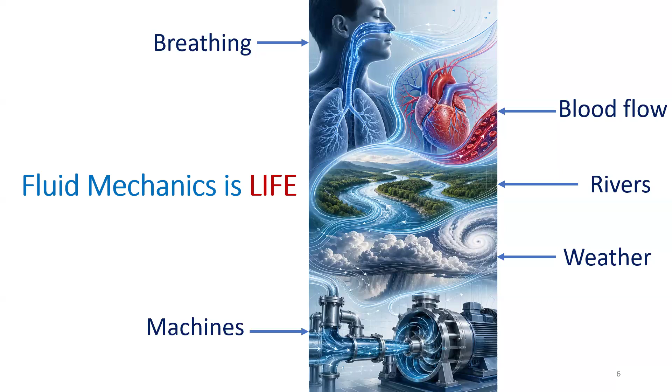There is plenty of such applications. Now, when you're breathing, when you draw air into your body, that is an example of fluid mechanics. In the same way, blood flow, flow of rivers, both natural and open water channels, exhibit behavior governed by fluid mechanics. Weather, formation of clouds, and movement of clouds is governed by it too. Then most machines, especially turbo machines, pumps and turbines that we operate, they all function based on fluid mechanics.

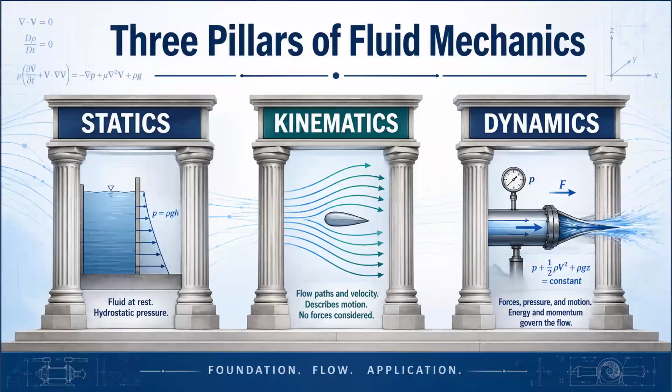Now moving on. Fluid mechanics, as you would have learned so far, can be classified into three fields of study, which I would term the three important pillars of fluid mechanics. First is statics, then kinematics, and then dynamics. Statics largely deals with fluids at rest. Kinematics deals with fluid motion without taking into account the cause of motion - we don't discuss forces, but rather describe the motion. And in dynamics, we take into account the forces, pressure, and study the motion as well. Force and pressure play major roles in fluid dynamics. Clear understanding of all three fields is essential for you to become an expert in fluid mechanics. Now, in Unit 1, you would have studied fluid statics.

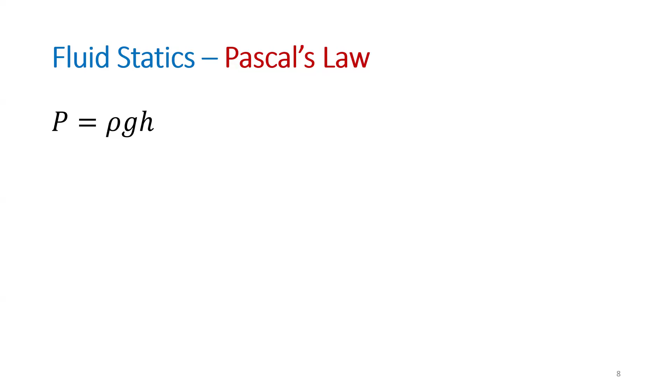One of the most important laws you have studied in fluid statics is Pascal's law, which gives you the equation for pressure at a point within a static fluid body, given by rho g h. Now, this Pascal's law has wonderful applications in terms of force magnification and force transmission. For example, when you press the brake in your vehicle, you are actually using Pascal's law, which states that force is transmitted equally in all directions. So when you step on that brake pedal, the fluid from the pedal cylinder gets transmitted to the wheel cylinders, and that action applies force on the wheels, resulting in the braking action. So this is one of the applications of Pascal's law, an essential part of fluid statics. In fluid statics, the key variable is pressure.

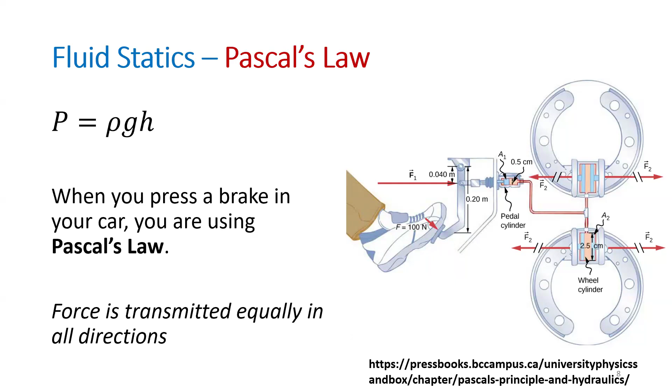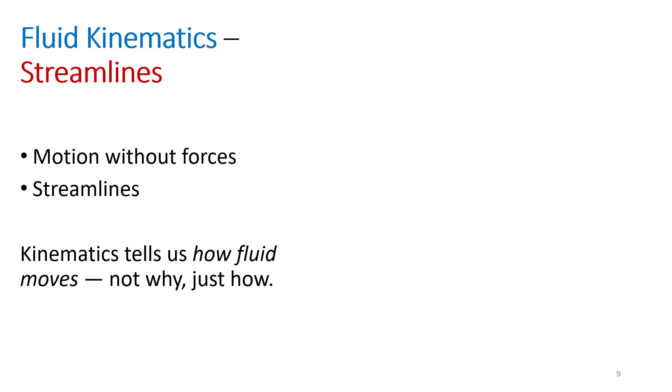Now, if you look at fluid kinematics, we largely deal with streamlines. What do you mean by streamlines? A streamline is a path followed by fluid particles at any given instant. So we describe fluid motion without taking into account the forces that will act - it just tells us how fluid flows. The key variables here will be velocity and acceleration - these are the two primary variables we will be studying. So it just tells us how fluid moves. For example, if you look at a Formula One vehicle, we would be interested to know how fluid flows over the structure, so we can identify regions which induce drag, and modify the structure so the drag is minimized. To understand that airflow, the flow of fluid around and along the structure, we make use of fluid kinematics.

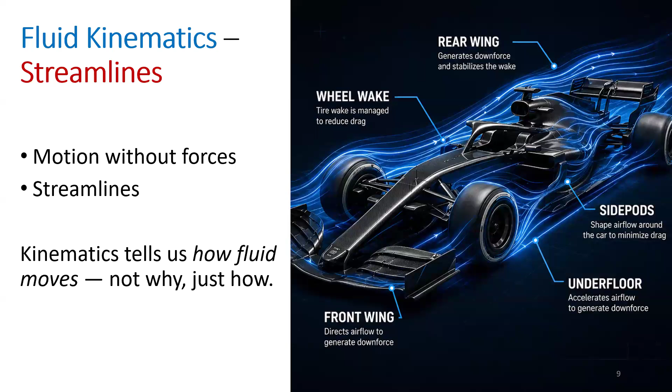Then comes the most important area, which is fluid dynamics. I'm sure all of you have studied Bernoulli's equation this semester, a wonderful equation which has allowed humans to build so many wonderful fluid applications. The Bernoulli's equation essentially gives you the relationship between variables such as pressure energy, kinetic energy, and potential energy. It basically states that the sum of pressure, kinetic, and potential energy has to remain the same. Therefore, this leads to the important insight that if velocity changes, the pressure will also change. So this is what you have studied in fluid dynamics.

Now going forward, we now enter into using this Bernoulli's equation - you can understand why airplanes fly. You can see that because of the difference in velocity, we create pressure differences, and it is the pressure drop that provides the lift. So that's one of the reasons why airplanes fly. We also look at why fluids will accelerate.

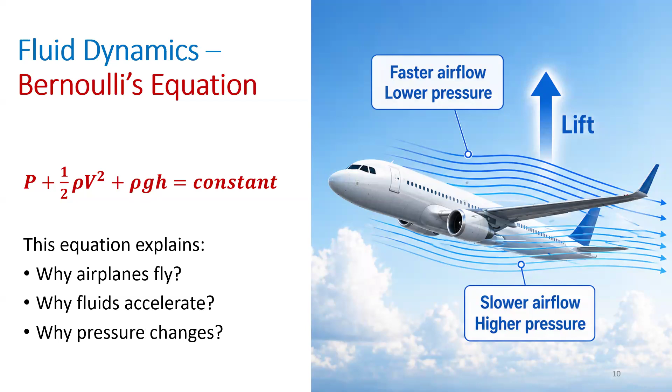We also look at why there should be pressure change. That is also an important application. So to summarize where you stand, you have studied fluid statics, kinematics, and fluid dynamics. You have looked at fluid at rest, the motion of fluid particles, and the fluid forces. So this is where you stand.

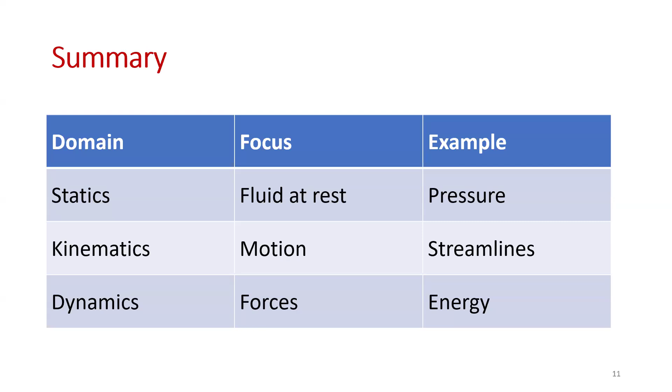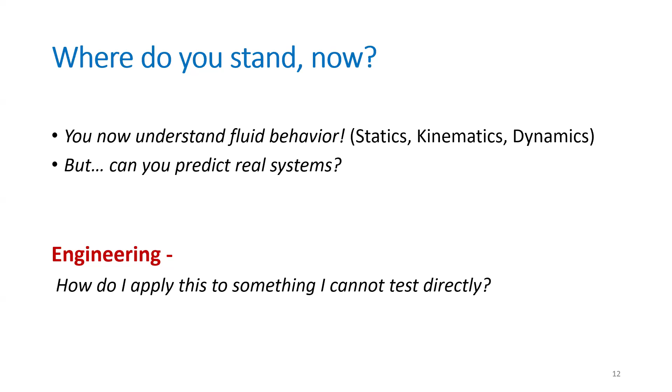Now what I want to know from you is, by understanding this fluid behavior, is it possible for us to predict real systems? Because when you are engaged in engineering, you will have to apply this knowledge to build and operate something. So the key thing to ask is, how do I apply this knowledge to something that I cannot test directly? Say, for example, a dam. I cannot build it and then test whether it will work or not. That will be dangerous. So what do we do then?

The problem we are dealing with is, I cannot test a real dam, I cannot test a full aircraft, I cannot build and then test whether it will work or not - dangerous. I cannot test a full river, it's massive. So what do engineers do? They build models. So this forms the main topic of the day: to understand the performance of a prototype, we will build models and study them. Through that model, we will predict the performance of the prototype.

Oh, I'm sorry, my bad, my mistake. Let me... just a second. I'm sorry, just hold on for a second. Let me share my screen again. I hope the screen is visible now. Yes sir, all right, okay.

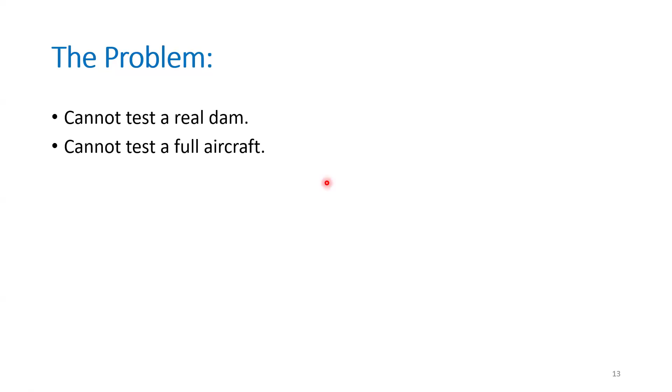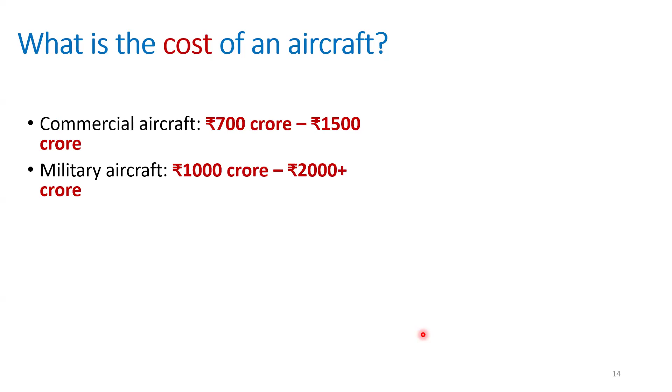Now, why is it needed? Because we all know that aircrafts are very expensive. Usually, a commercial aircraft is somewhere between 700 to 1,500 crores. Military fighter jets are between 1,000 to 2,000 crores. For example, our Rafale is estimated to be somewhere about 1,600 plus crores of rupees. Therefore, we cannot prepare the prototype and then check if it will work or not - that is not how we do engineering.

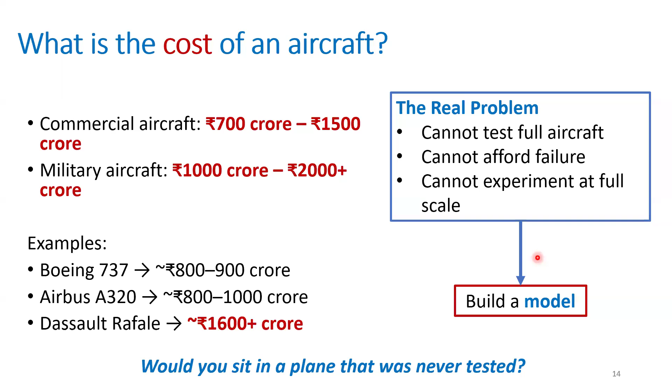What we do is we build a model. And this model cannot be randomly made - if I ask you, would you sit in a plane that was never tested before? All of you definitely say no, absolutely no. No matter what free seats they provide, you will still never enter that plane. So that is why similitude and model analysis is very important.

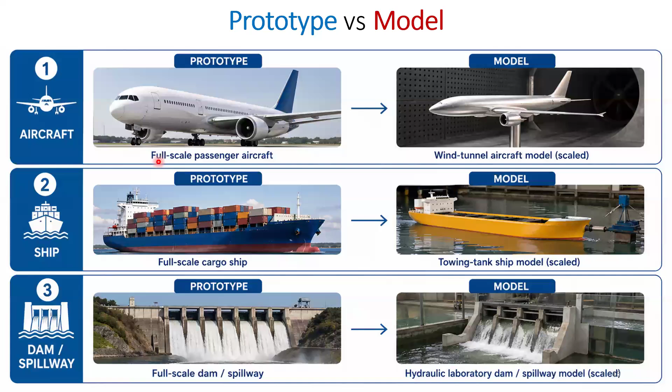The same way you have a full scale ship on the left. To test its performance, we have a scaled down model of the ship. Similarly, you have a full scale dam along with the spillways, and you have a similar model which can be operated inside a lab. Therefore, this is what you see as the difference between prototypes and models.

What we really mean is, prototype is the real system - it is the actual dam, aircraft, or ship - whereas model is either a scaled up or scaled down version which is used for performance analysis. So the difference is, models are lab operated scaled down versions, whereas prototype is the actual real structure.

I've got a small little video here to play, which will show you how they test models to actually predict the behavior of the real prototype. I'll just play this video - please have a look, let's check if it works.

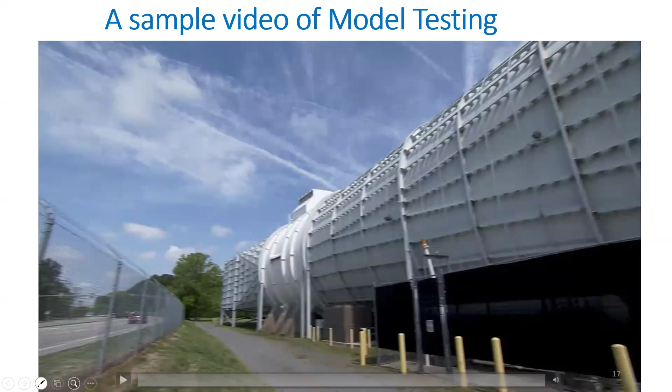Able to play it? Just a second. Yeah.

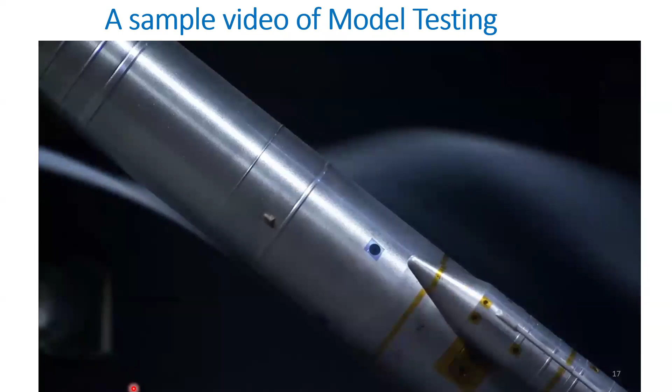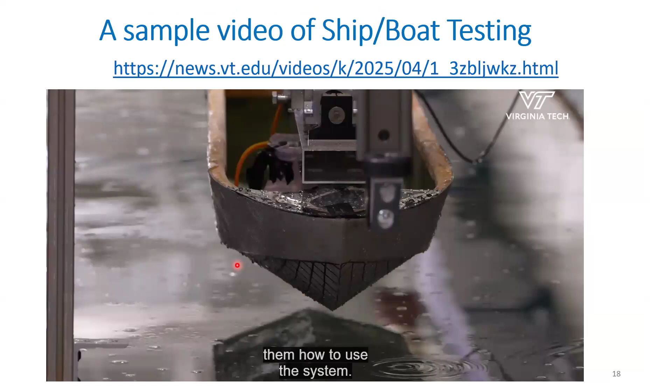That video shows how a wind tunnel test is done on a model spacecraft or an aircraft. I've got a video of how they test a ship too, which we will see if time permits towards the end of the presentation. So with this, you understand the difference between a model and a prototype.

Now, what I want to ask you is, if I test a small model, will it behave exactly like the real aircraft? What do you say? Can you enter in the chat box? Will it behave exactly? Shivtej is saying no sir, right? And Hussein is saying not possible at all, right?

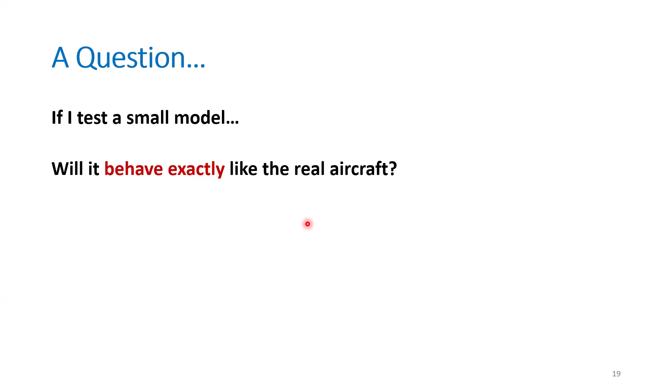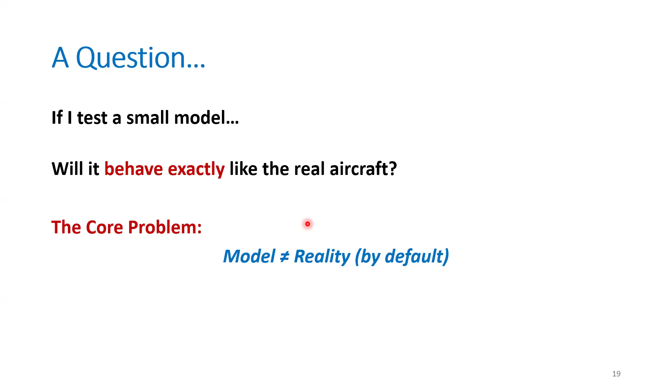Absolutely. Now, can I ask you why? Why will it not exactly behave like the real structure? The main problem is, by default, a model is not equal to the actual physical structure. It will never be. We will see why, right?

This is the reason why we need today's topic: similitude. A model is only useful when it behaves exactly like the real structure, and this is possible only when we design models by taking into account principles of similitude and model analysis. So what engineers typically do is, when the cost of failure is very high, we will have to rely on models.

Now let us quickly think why, by default, a model is not equal to reality. This is because, say that I prepare a model which is 1/10 of the actual structure, so I have scaled it down to 1/10. Will the design always be proper?

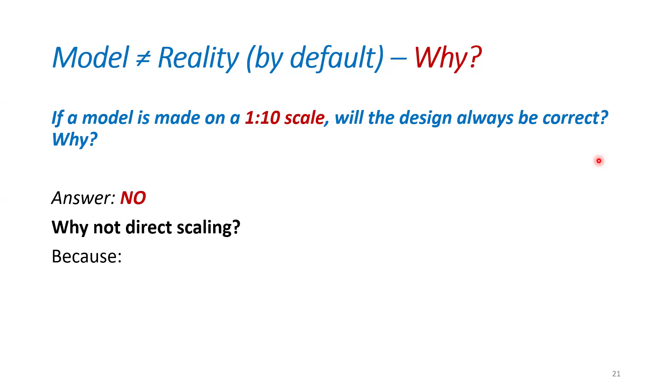Answer is no. Why will it not work? Because only scaling the geometry will not make the design proper. For the model to be an actual representation of the real structure, the forces should also be similar and proportional, right? And we all know that forces don't scale linearly, right? Even fluid behavior will not scale directly when you scale the geometry.

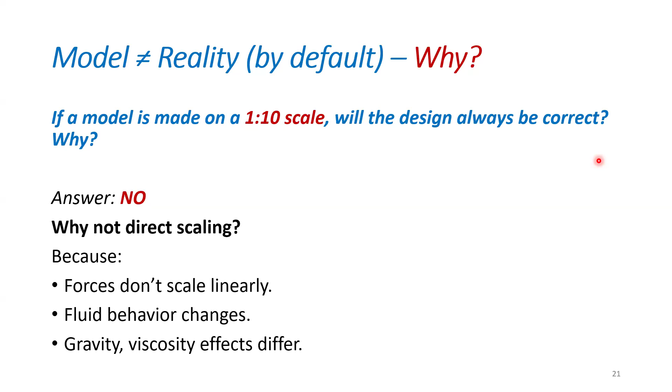Just because you are making the model small, that doesn't mean you can apply smaller forces, smaller velocity, or smaller viscosity on the structure. That won't work. Most fluid properties such as gravity, viscosity, and velocity, their effects will differ when it is on a full scale versus a model scale. Therefore, direct scaling of geometry alone will not solve the problem.

I'll give you a small example to help you understand why direct scaling won't work. Suppose we have a 10-storied building, 30 meters in height. Now, if a human being falls from the top, absolutely it will be fatal, right? The human will die. Now suppose I scale it down, this 30 meters proportionally to 3 centimeters.

I will scale it down significantly, and I will scale the human also now, to the size of an ant. Now, if that small ant-sized human falls from this 3 centimeter tall building, will something happen to him? No, he'll be safe now. So I have directly scaled it, but the end effect is different.

Why? Because the physics changes. Geometric scaling will also change the physics. For example, when the small ant-sized human falls, air resistance becomes more important, and the mass of that smaller human becomes very less. Therefore, the end effect is also not the same.

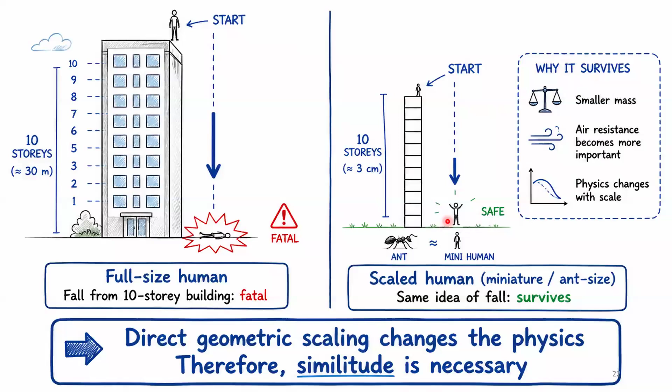This is where principles of similitude become necessary. Now, how do we define this? What do we mean by similitude? Similitude basically refers to the similarity between a model and a real system, that is, how similar the model is to the prototype.

A clearer definition is that similitude exists when a model and prototype exhibit similar behavior when all the physical parameters involved are properly scaled. So similitude is a condition which will exist only when the physical parameters are properly scaled, and not just the geometry. This figure we have seen before.

For this model that you see within the wind tunnel, for it to be an actual representation of the prototype, it should be scaled in a way that many physical parameters are properly scaled and not just the geometry.

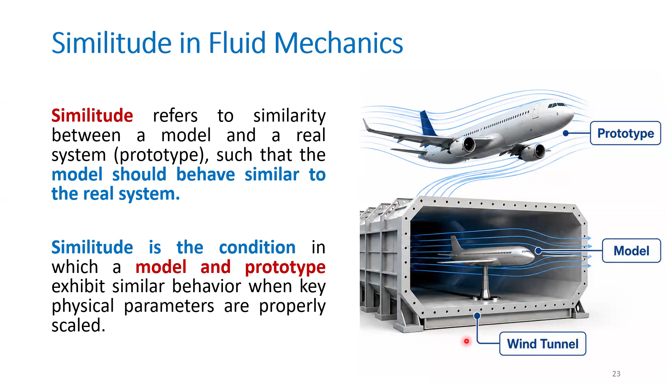Now, the key idea is in similitude we have three main parts: number one is geometric similarity, number two is kinematic similarity, and the third one is dynamic similarity.

Now what do we mean by all these three? When I talk about geometric similarity, it means that the ratio of geometric proportions is common. For example, the length of the model divided by the length of the prototype, or breadth of the model divided by breadth of the prototype, or similarly the height of the model by height of the prototype - this ratio should be constant. This holds good with respect to volume and surface area also, which will be length squared and length to the power 3 for volume. Therefore, those ratios of length, area, volume have to be constant. This is what we mean by geometric similarity.

Now what do we mean by kinematic similarity? Here what happens is the flow patterns must be similar - the streamlines that exist in the prototype and in the model must be the same. We talk about velocity at a point in the prototype, which must be proportional to the velocity at the same point in the model. Typically we talk about direction of flow - velocity being a vector, the direction of the streamline, the direction of flow at a point in both prototype and model must be the same.

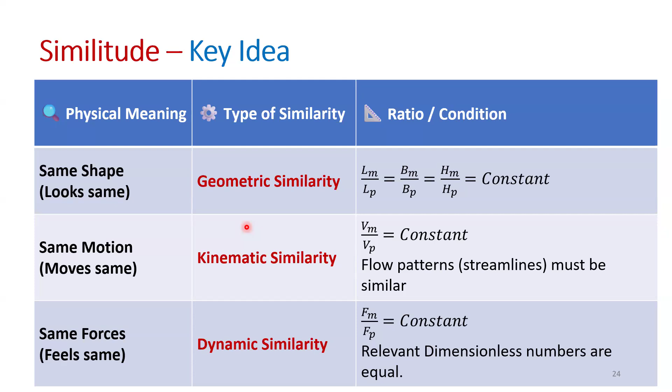In simple terms, geometric similarity will make sure that the prototype and the model look the same. Kinematic similarity will make sure that both the prototype and the model have similar movement - the motion of both structures subjected to airflow is the same. Whereas dynamic similarity is the one which will make sure that the effect of forces on the prototype and the model feels the same. So it looks the same, moves the same, and feels the same. Therefore, this is what we mean by similitude.

Now I just want to ask you one question - which do you think is more important? Is it same shape, same motion, or same forces? Please put your answer in the chat board. What do you think is more important? Are all three equally important?

Saurav says that same forces is important, and Hussein says shape. Amit says all three. Ashwini also says all three. Now, that is true.

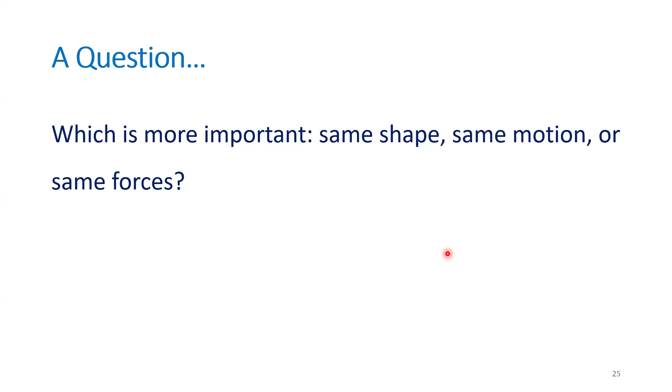All three similarities are important, but just for the end effect purpose, I will say that dynamic similarity stands slightly more important, because unless the forces match geometrically, both prototype and model may look very similar - if you scale it down, they just look the same. But if you do a study, you will get wrong answers if the forces don't match. So I will say dynamic similarity is more important.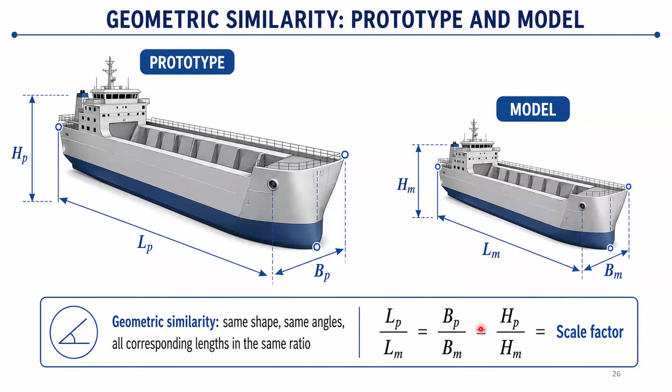Now why is this important? It is important because we actually know that when fluid flows, and if there is a sudden obstruction, there will be formation of vortices.

There might be formation of fluid separation and so on. Now, if that happens in the prototype, it should be exactly captured in the model as well, right? If that doesn't happen, then your analysis will actually be wrong.

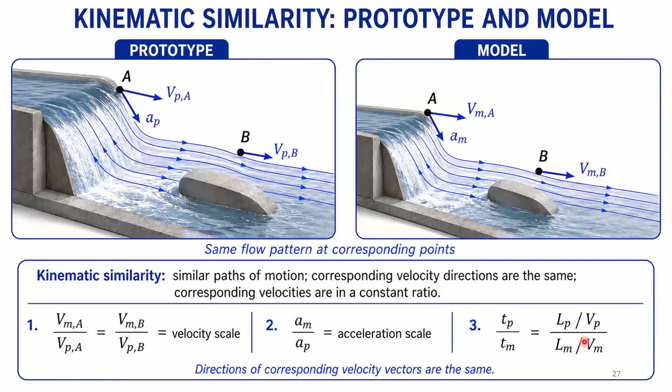Now, moving on, the third aspect is, when do we say that dynamic similarity exists? This is when the forces that act on the prototype and model are proportional or same.

Say, for example, when you have a cargo ship, some of the important forces there is definitely gravity, which is important. Then we have the viscous forces acting through the fluids because it is moving on the fluid, so there will be fluid friction, therefore viscosity is very important. Then there is pressure acting on the structure of the ship, and since it is a massive ship, it will also have significant inertia. Therefore, there are four forces here.

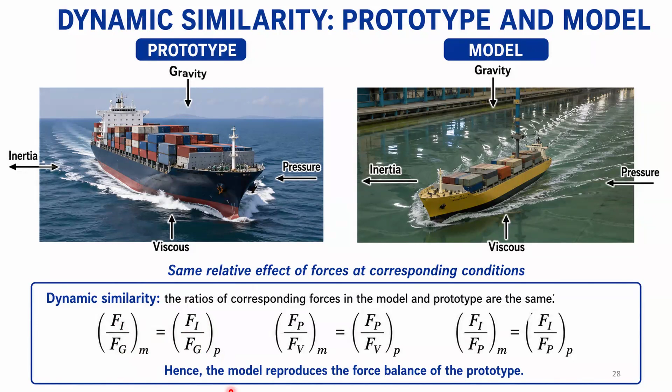Now, when you build a model, the effect of these forces on the structure should be similar. So if suppose I feel that gravity is more important, and if I take the ratio of inertia force to gravity force in the model, it should be same as that of the inertia force and gravity force in the prototype. Therefore, the model should reproduce the exact force balance in the prototype, that ratio of forces in the prototype should match that of the model.

Now, what are the various forces that act in fluid flow? We have studied many fluid forces. I have made a list of some of the important forces that exist in fluid flow. One, as usual, is inertia force.

Then we have pressure forces, especially when dealing with flow through pipes, when fluid is flowing through a closed pipe, then pressure becomes important. Similarly, lubrication flow systems might showcase dominance of viscosity. Open channels and storage tanks make gravity very important.

Now, if you are talking about nozzles, if you are talking about fuel spray, then surface tension force becomes very important. Then there is elastic or compressibility force. When we talk about fighter jets moving at Mach 1, Mach 2, here the compressibility effects become very important. Then buoyancy is also a significant force that acts on structures which are partially submerged in fluids. Similarly, in some unique applications, electromagnetic forces also play a role, normally in nuclear reactors and so on. Therefore, these are all the forces that act.

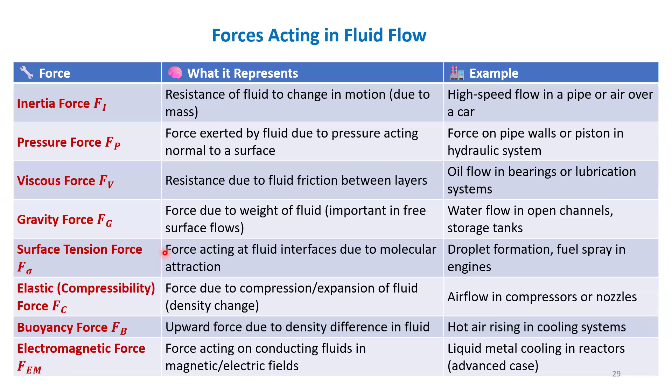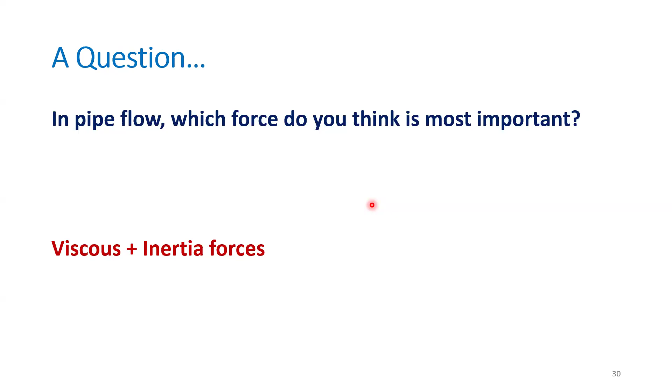Now, what are the variables of importance here? Obviously, since we have to match it, diameter is an important variable, isn't it? So D is important. Velocity of the flow is also important, right? Similarly, since fluid properties are important, density and viscosity also become important. So I've got four variables here.

Now to prepare the model, I will have to scale each one of those variables. I have to design the model such that all these variables are actually scaled. Now that is difficult, isn't it? It becomes impractical to scale all these variables, and some of these you will not be able to scale at all, and it is not easy.

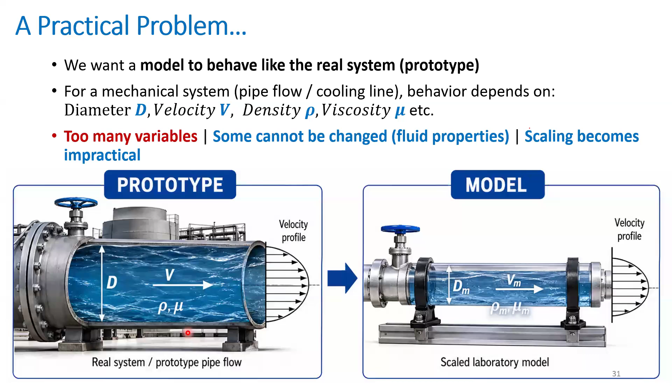Now this is a problem. This is a practical problem. While we want the model to behave like the real system, which is the prototype, it is not possible for us to match every variable directly. Okay, how do we solve this problem?

This is where we make use of dimensionless numbers. Now, in the previous module, Nishigan sir has taught you about dimensionless numbers. You have learned Buckingham's pi theorem. You have learned how to create dimensionless numbers by looking at the repeating dominant variables through a structured process. You are able to derive dimensionless numbers.

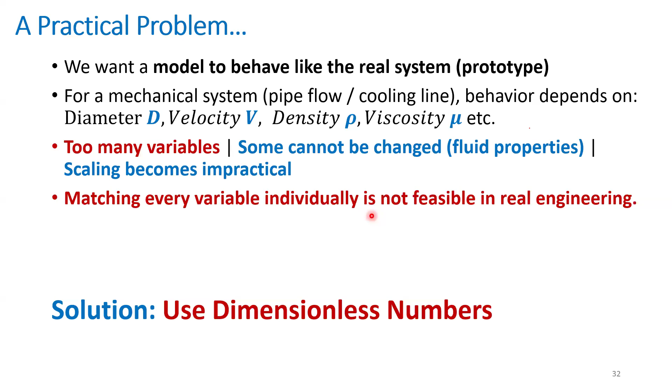Now our problem of scaling becomes easier when we make use of dimensionless numbers. In dimensionless numbers, instead of scaling each and every variable, we will group them into dimensionless groups.

Suppose if you look at the same problem of pipe flow, in the prototype we had four variables: diameter, velocity, density, and viscosity. Now, to prepare the scaled-down model, I have to group these variables D, V, rho, and mu such that they form a dimensionless number, meaning it will not have a unit. It is independent of dimensions, meaning this number will apply equally to a big size structure and a small size structure. Size doesn't matter to this number.

Therefore, this is a dimensionless number. So we can group diameter, velocity, rho, and mu as rho V D by mu, which will end up as a dimensionless number known as Reynolds number. This is a very important dimensionless number which we use in fluid mechanics.

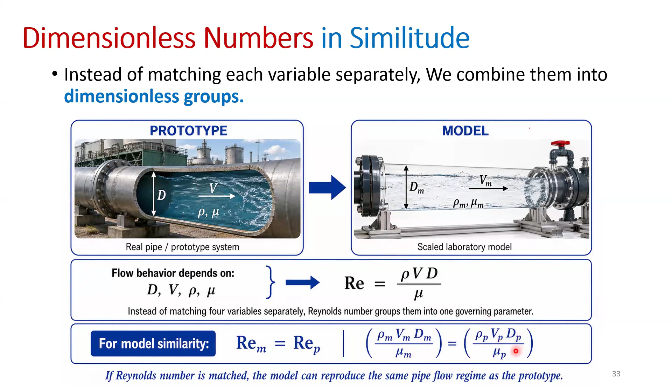Now, for the prototype and the model to show similar behavior, all you have to make sure is that the Reynolds number of the prototype flow matches the Reynolds number of the model flow. Just by matching one number, we get similitude. That is, Reynolds number of model equals Reynolds number of the prototype, meaning rho m, Vm, Dm by mu m matches that of the prototype. This will ensure similitude is maintained.

Now let us apply this to a simple problem and see how it works. Let us assume that there is a real cooling pipe through which a coolant, water, is flowing. This cooling pipe has a diameter of 1 meter, and water is flowing through it at a velocity of 2 meters per second, in the prototype.

Now, I have made a laboratory model using a 1:10 scale, that is, I have made it smaller by 1/10. Therefore, the diameter, which was 1 meter, is now 0.1 meter. We assume the fluid is the same in both model and prototype. What is my task?

I have to find out what should be the velocity in the model such that the flow behavior is the same. For the flow behavior to be the same in both prototype and model, what should be the velocity of the model? This is the problem. So, prototype is 1 meter, model is 0.1 meter, velocity in the prototype is 2 meters per second. What should be the velocity in the model, which is scaled down by 1:10?

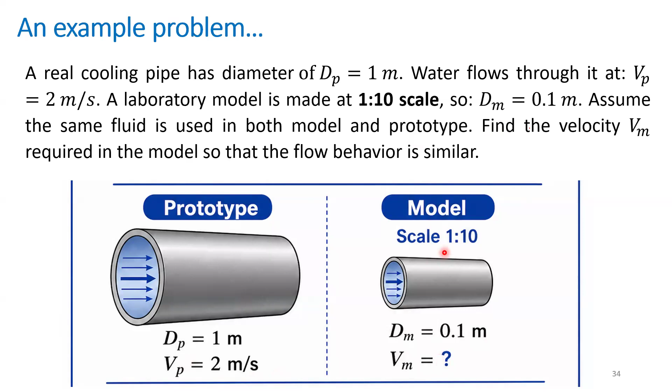Now, you can obtain this velocity in the model directly by making use of the Reynolds number. But before that, I want to ask you something. The pipe has become smaller by 1/10. Now, what do you think will happen to the velocity? Will it become more? Will it remain the same or will it decrease? Please answer.

Ashwini says velocity will increase. Advai also says it will increase. Tanuja says more. Hussein says increase. Advai says it will increase by 10 times more.

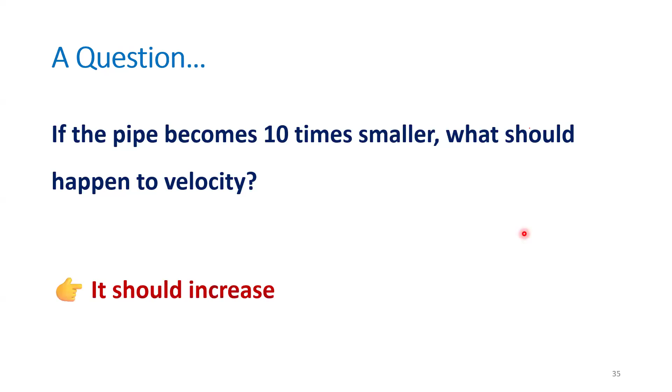Absolutely, you're all proper there. The velocity will have to increase. Let us see why and let us see how. Now let us go ahead and solve this problem.

For pipe flow similarity, the Reynolds number must match, isn't it? So the Reynolds number in the model should become same as the Reynolds number in the prototype. Therefore, rho Vd by mu for both model and prototype has to be same. Now since the fluid is same, since water itself is flowing in both prototype and the model, the density and viscosity variables can be taken out. Therefore rho and mu from both sides will go off. Therefore you have Vm Dm equal to Vp Dp, and from this you can find out the velocity of the model.

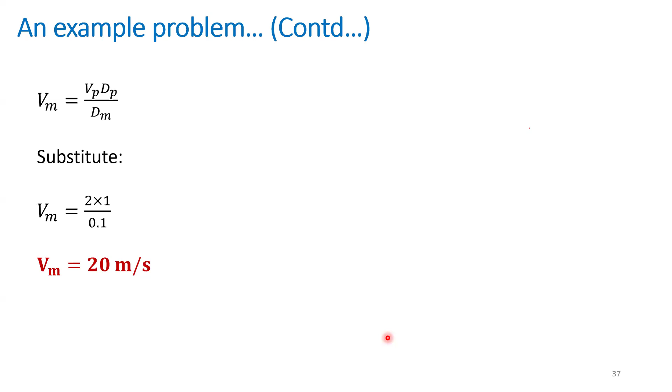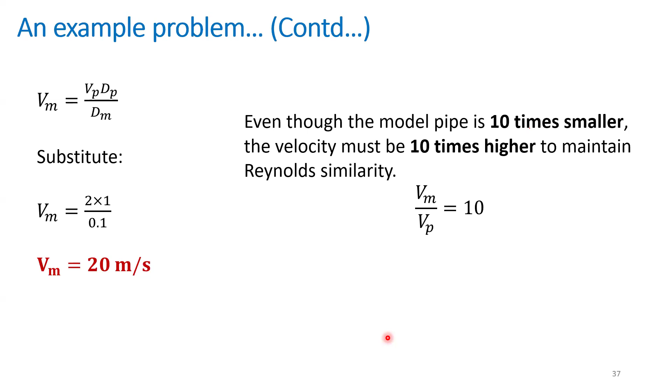So let me substitute the answers, 2 into 1 by 0.1, and I get the velocity in the model as 20 meters per second. In the prototype it was 2 meters per second. Now it has become 20 meters per second. Therefore, even though the model becomes 10 times smaller, the velocity must be increased by 10 times to maintain similar effect on the model. For the model and the prototype to experience similar effects, for the Reynolds number to become same, velocity will become 10 times greater. So you have seen how dimensionless numbers help us in getting good, valid models.

Now what are the commonly used dimensionless numbers? I have made a list of 5 dimensionless numbers here. One is Reynolds number, which is the ratio of inertia force to viscous force. This is usually applied in flow through pipes, or even airflow over vehicles where viscosity dominates. When gravity forces become very important, such as open channel flow, ship motion, and all that, we make use of Froude number.

Froude number is velocity divided by root of gravity into L. Similarly, when pressure forces become very important, say when we talk about pumps, pressure is very important, isn't it? And especially when there is pressure drop within a pipe, loss of pressure, we talk in terms of Euler number.

Then there is Weber number, which takes into account surface tension force. Typically when we deal with formation of drops and fuel sprays, this is where surface tension becomes very important. We make use of Weber number.

Then we have Mach number, which many of you would have heard about. It relates velocity to speed of sound. Why? Because at very high speeds, density of the fluids will change, and this change in density will lead to compressibility effects, which is actually change in density. This happens at high speed gas flows. Here we make use of Mach number, which is velocity of the projectile divided by speed of sound.

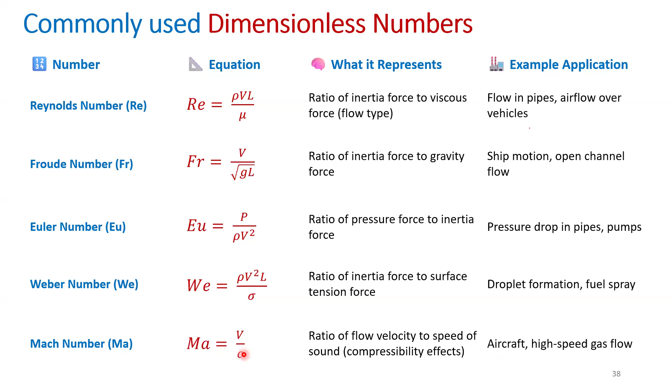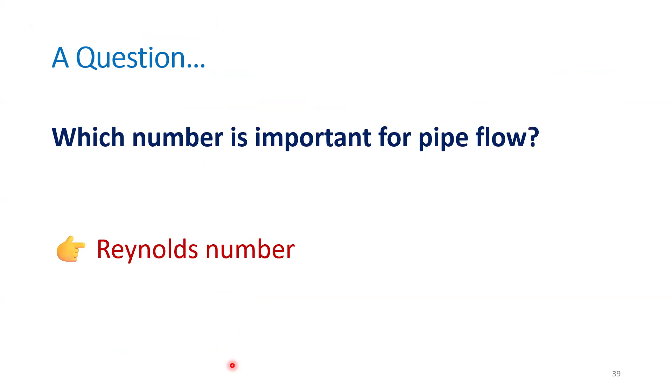Now I just want to ask you something: which number is important for pipe flow? We have already seen this, isn't it? Therefore there is no point in asking again. We actually know that for pipe flow, Reynolds number becomes important.

Now based on these dimensionless numbers, there are a few set of laws which will help you obtain similitude and help you in your model design. The main idea is if you focus on dynamic similarity, that is, when you take the ratio of forces in the model and prototype and make it same, then your model issues become very less, because dynamic similarity is very important. And since dimensionless number matches are obtained by taking into account the forces that act...

But then the problem is we cannot match every dimensionless number, isn't it? Therefore it is important for you to identify which is the dominant force, and get the appropriate dimensionless number and match it. And that is what we mean by model laws. Model laws will look at the dominant forces and then help us create appropriately matching prototypes and models.

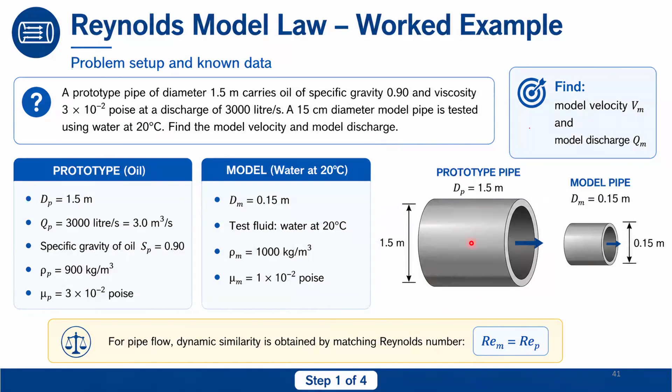When you match Reynolds number of the model with that of the prototype, we cannot ignore density and viscosity. Why? Because in the model it is water, and in the prototype it is oil. Therefore, you cannot take it out. So you keep all the three ratios of density, diameter, and viscosity, and you get the velocity ratio, Vm by Vp.

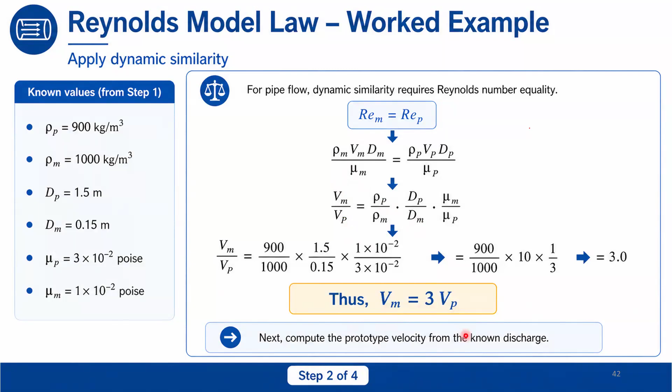And we get the relation that velocity in the model should be three times that of velocity in the prototype. Now you can substitute, because they have given you the discharge for the prototype. How much is that? 3000 liters per second, or 3 meter cube per second. Therefore, substituting that, you will get the velocity of the prototype.

As 1.697. And because we know that discharge is area into velocity, Q equal to AV, you have already studied this. Therefore, velocity in the prototype becomes 1.697. Substitute it here, and we get the velocity in the model to be three times that.

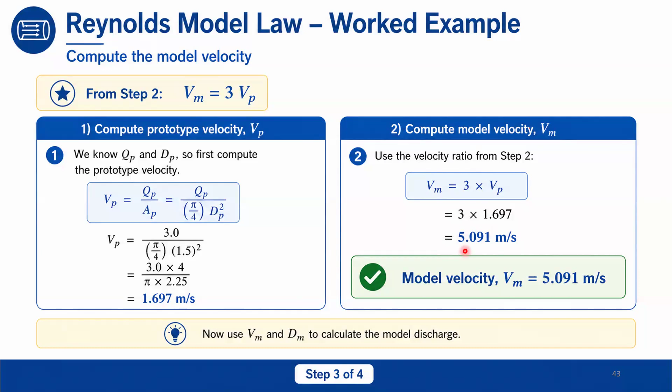Therefore, velocity in the model should be greater. It is 5.091 meters per second. So this is how we obtain velocity in the model.

They have also asked you to find out what will be the discharge in the model. So you find out Qm, area into velocity, substitute it, and you get the answer as 89.9 liters per second. So this is how you can apply Reynolds model law when viscosity is the dominant force, and you can design the model.

Similarly, Froude model law. Froude model law is important when gravity is the dominant force, in spillways, nozzles, surface waves, and at the surface of two different fluids. When you're designing things like this, Froude model law becomes important.

And Froude number we know. I'm sorry, I just lost the screen. Just a second.

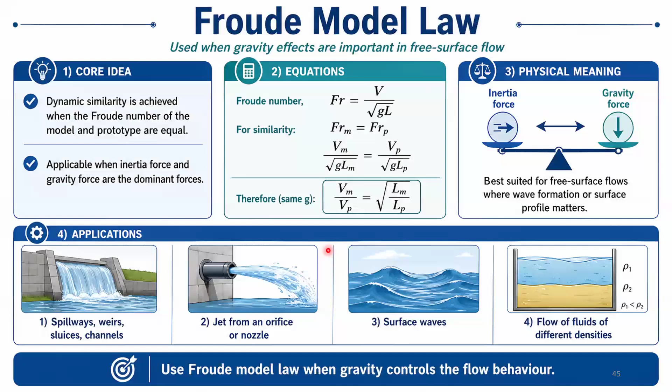Is my slide visible? Yes sir. Okay, so this is the Froude law. So in Froude law, the two dominant forces here are your inertia force and the gravity force. Now, these two should balance.

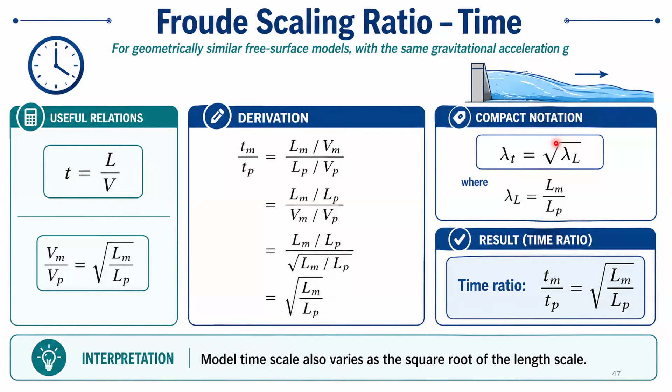Now, let me directly go to a problem there. We are losing time. So, now in this problem, we see that a spillway model, it's an open flow.

Therefore your law becomes like... Okay, now here the problem states that a spillway model is built at a scale of 1 is to 40. And in the model, a velocity is 2 meters per second, discharge is 2.5 meter cube per second.

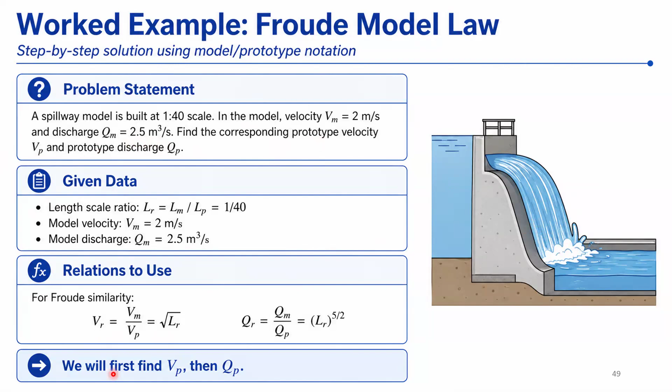Find out the appropriate prototype velocity and prototype discharge. So since this is an open channel flow where gravity and inertia become important, we look at Froude law. Then we will find out: the length scale we know it is already given as 1 is to 40.

Now, similarly, we'll have to find out, we have to substitute and obtain velocity of the prototype. In the model it is 2. If it becomes 2 into root of 40, therefore, velocity in the prototype is 12.65 meters per second. Now you can do the same thing and find out a discharge as well.

I'm going to speed up a bit because it's almost 1 hour now. So, all right.

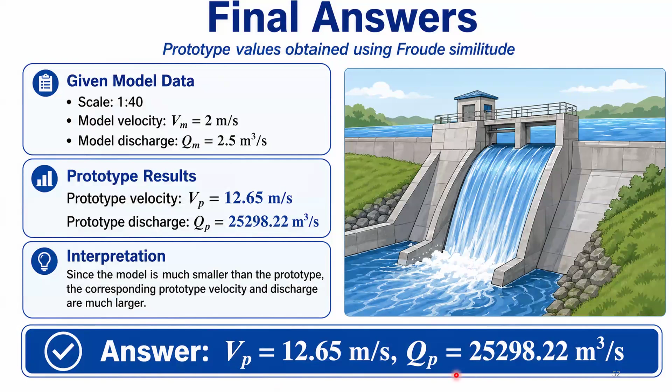So the final answer is velocity in the prototype is 12.65 and discharge is 25298.22 meter cube per second. Now, the next important number is...

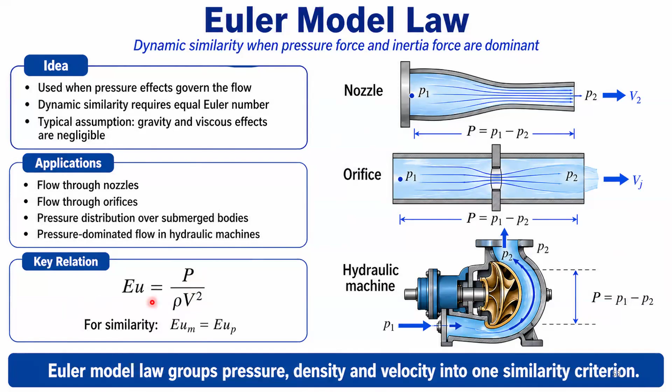Euler model law is typically used when pressure effects are more dominant. Therefore, when we have flow through a nozzle or flow through hydraulic machines where pressure drop becomes very important, in such cases we make use of this Euler law, which is Euler number, P by rho V square. Now here we can get the pressure drop.

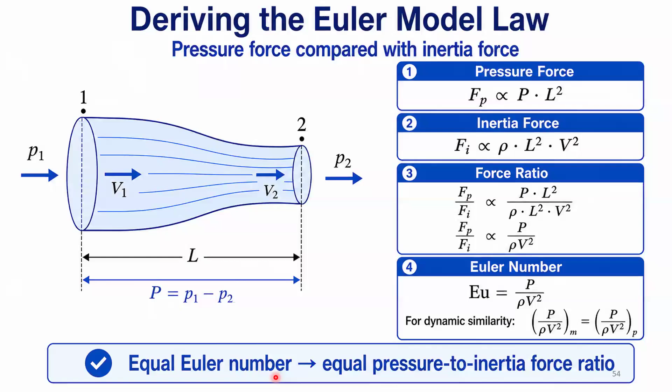I have derived this law here. I will share the slides with you and you can go through this. Therefore, equal Euler number in both model and prototype is important.

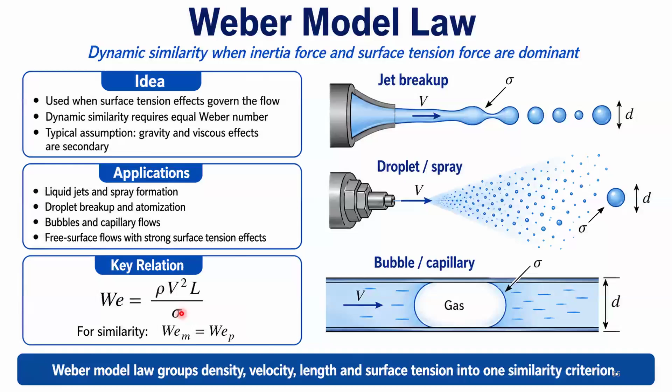Then we have a Weber number. Weber number is important when you are dealing with fluid droplets, when you form bubbles and when you are dealing with air bubbles in capillary tubes, when we want to know how long will a jet remain without breaking up, or what will be the diameter of a fluid drop. When dealing with those sort of problems, it is important to make use of Weber model law. This is the ratio of rho v square L by sigma, where sigma is surface tension. Surface tension forces and inertia forces are more dominant here. This is also similar.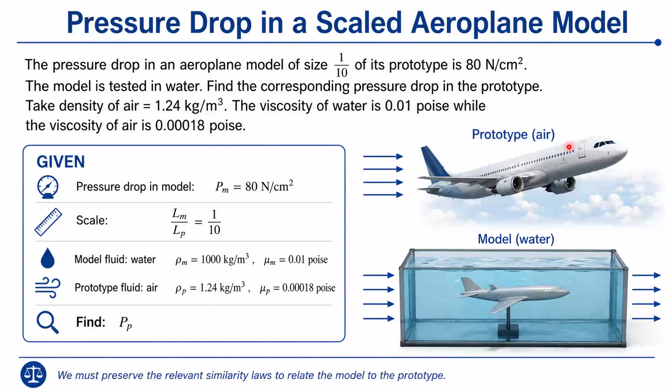Air density is 1.24, water viscosity is 0.01 poise, and the air viscosity is 0.00018 poise. So we have to find out what is the pressure drop in the prototype. Here we make use of two laws simultaneously.

Now, this is why I wanted to show this. In applications, depending upon the dominant forces, you may have to choose one or more laws to prepare the model. Here Reynolds law is important because viscosity is important here. At the same time, pressure drop is also important because it is the pressure drop that gives you the lift. Therefore, in designing this, you have to take both Reynolds law and Euler's law into account.

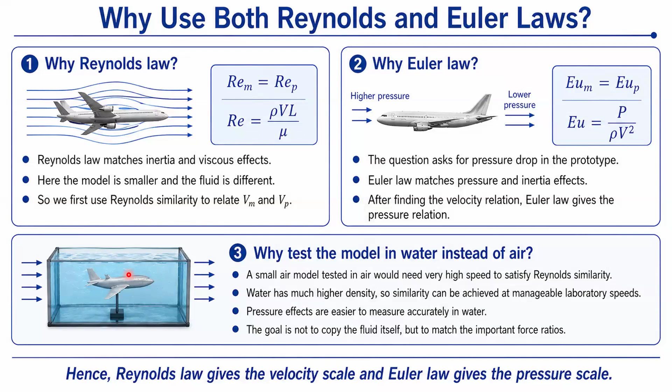Now, one thing is, why are we testing a flying object in water instead of air? This is because to obtain the high speed effect in air, if you create a model, we have seen how velocity becomes very high. Velocity in the previous problem was the model velocity being 10 times that of the prototype. Here the aircraft speed is very high. To get that same effect in a model, velocity will become too much, and it will not be humanly possible for us to test that model. Therefore, what we do is we immerse it in water. Water, since it has higher density, allows us to inflict that same effect in the model at a reduced, more practical velocity. So this is why it's been done.

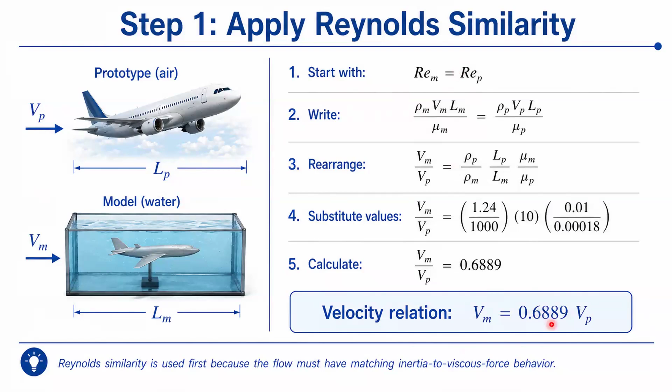Now, in the same way, we will begin with Reynolds number. We will match a Reynolds number of both model and the prototype, and we get the velocity of the model as 0.6889 times velocity of the prototype.

Then we will go into Euler's law, where we will match the Euler's numbers, and then we will obtain the pressure drop at the prototype as 0.209 Newton per centimeter square.

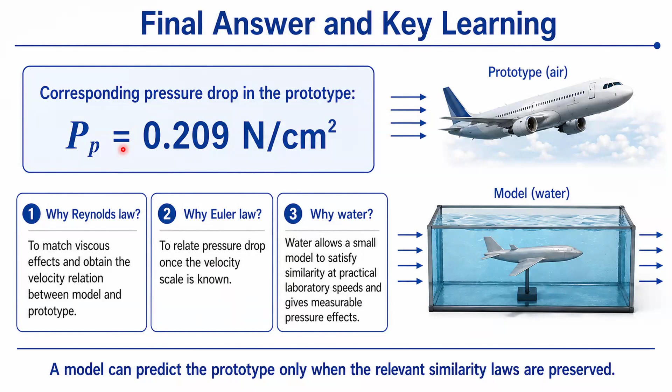So you can see that the pressure drop in the prototype is smaller than that of the model. All right, so this was an interesting problem. I just need 5-10 minutes more.

Now you have understood how similitude works, how geometric, kinematic, and dynamic similarities are important and where they are applied. We have also looked at dimensionless numbers and how it works.

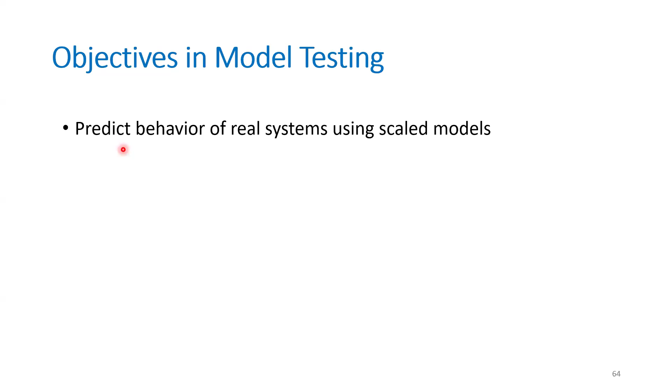Now, why do we need, what are the objectives of model testing? As we spoke, it is very important that we predict behavior of real systems using scale models because it is not possible for us to build the real system and then test if it is fail safe or not. It becomes very expensive and very risky. Therefore, model testing is important.

There are cases where the fluid flow is very sophisticated, where theory becomes difficult for you to apply these theoretical equations, and the only choice then is to experimentally check.

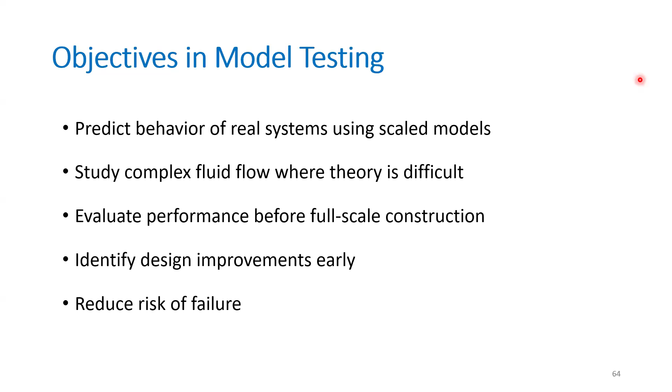Now model testing is also done to ensure that your performance is as expected, and sometimes if you need design improvements, we will get those design improvements early on in the design process. Model testing is very important.

Now I also want to talk to you about these days our computational power has become very strong, isn't it? We have got wonderful analysis tools. We have got CFD, we have got ANSYS, we have got OpenFOAM. There are so many simulation tools, but still, why do we have to do model testing?

It is because your simulation results also need validation, right? Therefore, model testing is invaluable. It has to be done.

Normally what we do is we will mount sensors on the models, get the data, use it in our simulations, and then check the prototype performance. Always keep in mind, simulation is not an excuse for not doing model testing. You have to do both simulation and model testing simultaneously.

Now, applications, there are plenty of applications. In those problems itself, you have seen pipe flow systems, pumps, and turbines, right? And nowadays, there is a lot of applications of fluid flow in electronics as well. So with that, I'm done with my presentation.

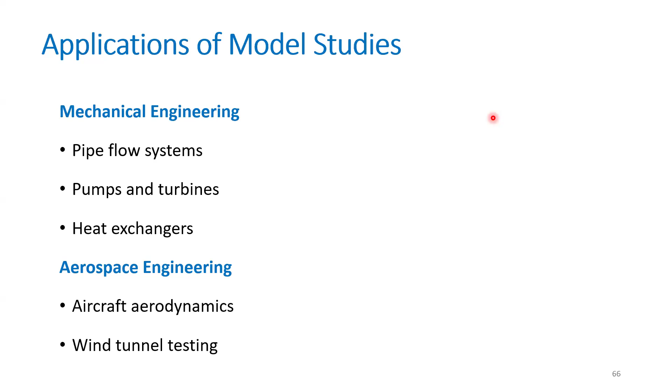Now, before I end, I just want to ask a few small quiz questions here. Can you please answer this question so that we can reinforce the learning that you have had? In similitude studies, what do we call the actual engineering system and the scale down version? Please answer this.

What is the answer for this? Model and prototype. Agree, all right. Now let's move on. So the answer is actual engineering system is prototype and the scaled down version is model.

Now, can you name the three types of similarity required to ensure similitude? We actually spoke about this, isn't it? Similitude has three aspects to it. What are those three? Number one is geometrical, then kinematic, and dynamic.

Prasanna has properly entered all the three. Advai has also mentioned length, Reynolds number. Saurav says forces, shape, motion - in a way, that's also proper, so it is shape, motion, and force. Actually, the three terms are geometric, kinematic, dynamic: same shape, same motion, same force.

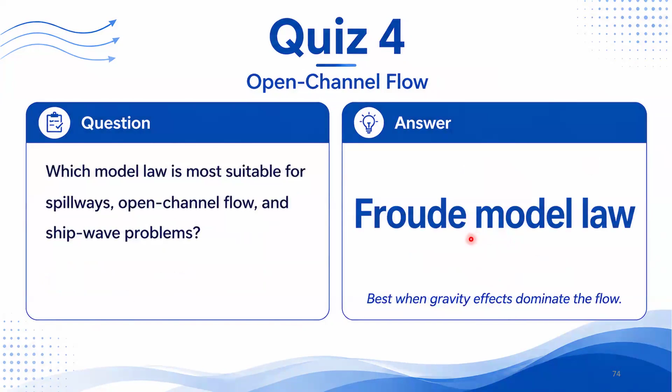Next, which model law is most important for spillways? Dam spillways, open channel flow, and ship wave problems - which is the important model law there? Is it Reynolds or Froude? Saurav says Froude. Absolutely, that's correct. Froude model law is important for open channel flow, where gravity effects are dominant.

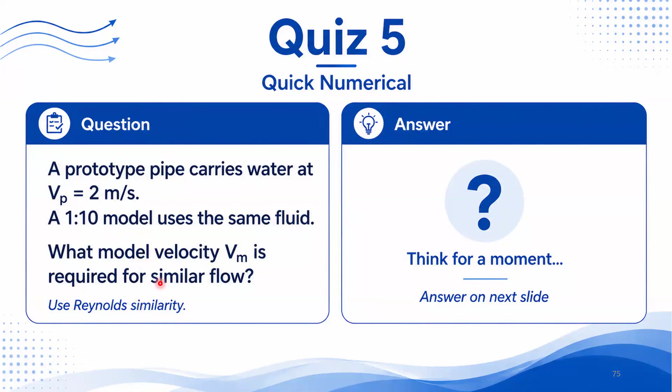Next, last question. A prototype pipe carries water at a velocity of 2 meters per second. We are making a 1:10 model using the same fluid. Now, what model velocity is needed for similar flow? It is 10 times, absolutely. So 10 times 2 is 20 meters per second. So the answer is 20 meters per second.